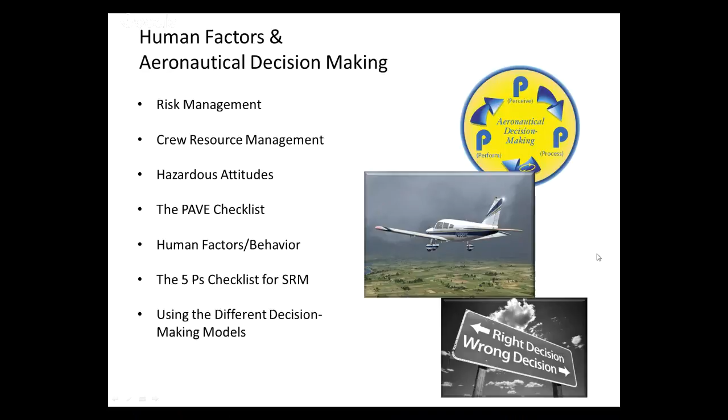When you actually look at the statistics the FAA and the NTSB publish from time to time on general aviation accident and incident statistics, and you look at the data over the past 20 to 30 years, there's a theme. Over 75% of all accidents have something in common. Actually, a couple things in common.

First, accidents that occur happen to be extremely preventable. A very large percentage of accidents happen to be preventable in nature. And there's a single common factor that you can always circle back to when it comes to general aviation accidents, and that is human-caused error.

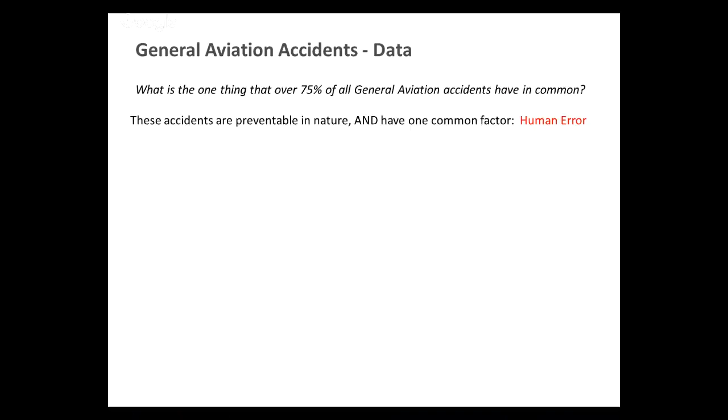In different contexts, of course. You might have heard it before in the news, whenever there's a notable aircraft accident, they always kind of talk about how there were these 3 or 4 factors, but at the end of the day, it was really the pilot's decision making or the pilot's actions that led to the root cause.

And if you look at some of the details, for instance in this report that was issued, I think this was issued in 2009 but incorporated data for a 20-year period, this is just a Pareto of Part 91.

Part 91 meaning general aviation, non-airline, non-commuter, business jet type activity, single engine, fatal accidents. You can just see the list. The Pareto list here is all things that we can more or less control, or is more or less within our control as pilot in command. Failure to maintain adequate flying speed, controlled flight into terrain, adverse weather, failure to avoid objects or obstructions, mid-air collisions, stuff like that.

The one thing you don't necessarily see on here, at least high up in the Pareto chart, is engine failure, or the plane just falling apart randomly. It's all controllable items, preventable items.

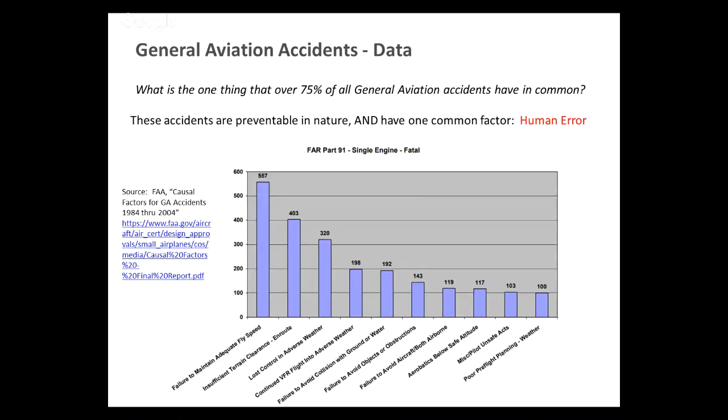Yeah, it's the last chapter of the book. It's chapter 17. It's all about the medical and human factors.

Just a side note, based upon Chris's comment from last time, will you make sure that your little icon at the bottom has the white border around it so that when I talk it doesn't flip the screen off? Yeah, I have it on now. Is it working for you? Oh yeah, I selected it on my end. I just needed you to select it on yours as well. Yeah, in case she watches this later, I was going to mention it. Oh yeah, good point. Cool, okay.

So let's dive into aeronautical decision making a little bit deeper.

ADM, aeronautical decision making, really encompasses the behavior a pilot has around two topics, two definable items: one being risk, and the other being hazard.

Risk, the way I like to think about it, is always present. There's always risks in everything we do in flying. Hazards tend to be items that pop up that were a risk and now happen to be a hazard. For instance, the weather. Weather is always a risk. Forecasts may not be correct, but are they so incorrect, or did you do your planning to such an extent that they transform from a risk into a hazard? Now there's something you actually have to deal with.

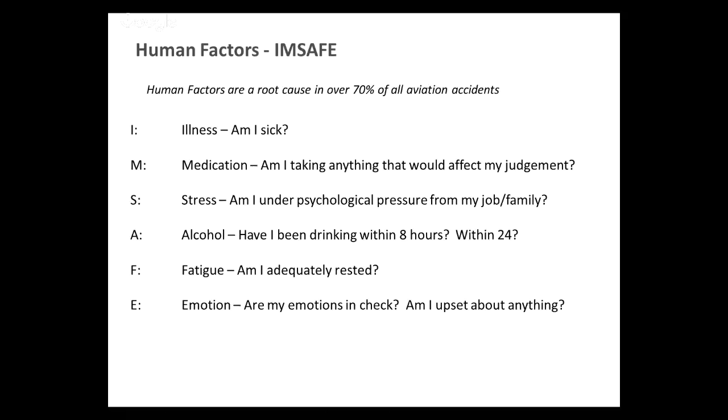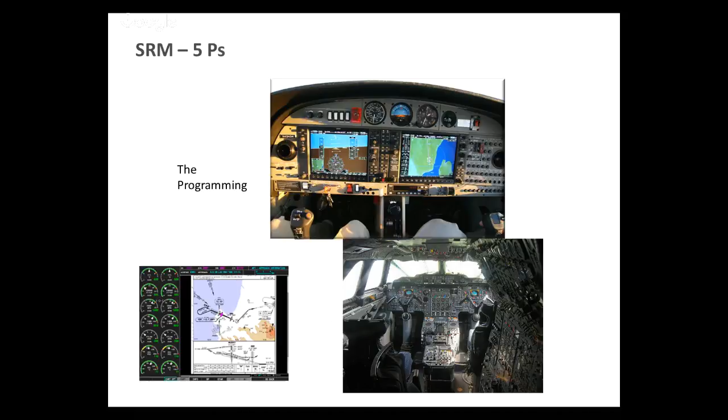So I've got a real life example I want to go through. Before we do that, does that the 5 Ps, does that kind of ring true? Do you understand how that might help you in your pre-flight planning to actually write some of that stuff out?

I do, and an interesting analog - even in my career world, you go to start a project, one of the things you do at the beginning and throughout is you're constantly looking for the potential risks to the project. So this fits with that professional experience of mine, I completely understand it. Yeah, that's a real good point, actually. That's like one of the big steps in project management, isn't it? Identifying where things are going to go wrong.

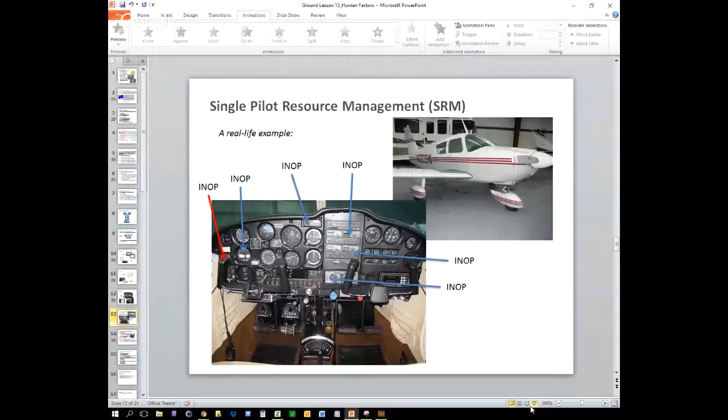Exactly. So I'm gonna walk through a real life example, and I think some of this stuff, unless you experience it in person or hear someone tell a story, kind of helps ground the topic a little bit. So let's walk through this example.

This was a year ago in November - year ago, maybe it was 2 years ago actually. I had my family in town, and my sister and her best friend flew in because Emily, my sister, and I were running in the Fort Worth Half Marathon. So everybody was in town. My parents drove their van down to watch, and it was great.

Well, Sunday, after the marathon, we were going to go flying. My father, who loves to fly, since I don't live at home anymore, doesn't get to fly that much. My sister hasn't been flying that much with me, but she enjoys it. And her friend had never been flying before, ever, in a small airplane. Wow, so this was going to be like a first experience for her. So she was extremely excited.

And so I was in a flying club - I might have told you this story before - that unfortunately had questionable equipment. I've got it up here on the screen. This particular aircraft is a Piper Cherokee. It was a PA-28 235, so it was like a Piper Cherokee with a souped up engine.

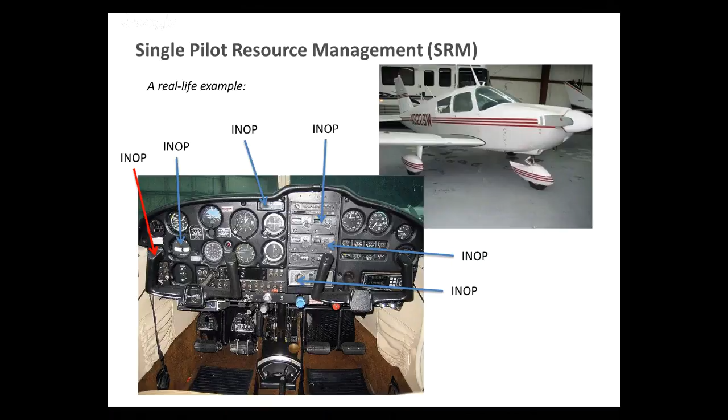So here we go, I'm going into my 5 Ps here, and I did not do a 5 P on paper, by the way, which got me into trouble - I did it in my head, which got me into trouble. So okay, here's the plan: what's the mission profile look like? Well, sister, dad, and friend going up for a joyride, we're just going Class G, not going into any controlled airports, just Class G flying. Dad loves to fly, friend has never been flying.

The plane is IFR certified, however, many of the avionics are inoperative, so take a mental note there. We've got a jerry-rigged comm transmit button set up - I put that in red because that would get me in trouble eventually here. So I made a mental note, it wasn't going to ground us, we were still going flying, but I took a mental note that I was going to have to make sure I used that properly.

The pilot, all good there. I passed the IMSAFE checklist. Passengers, of course, my dad's been flying, my sister's been flying. We're all good there, assumedly.

Our fourth passenger might have been nervous. She didn't look nervous. Of course, I'm a very careful pilot, so I want to make sure she's comfortable, check in with her, make sure she's got all her questions answered, and give her a good flight briefing. But that could be a risk, so I take a mental note.

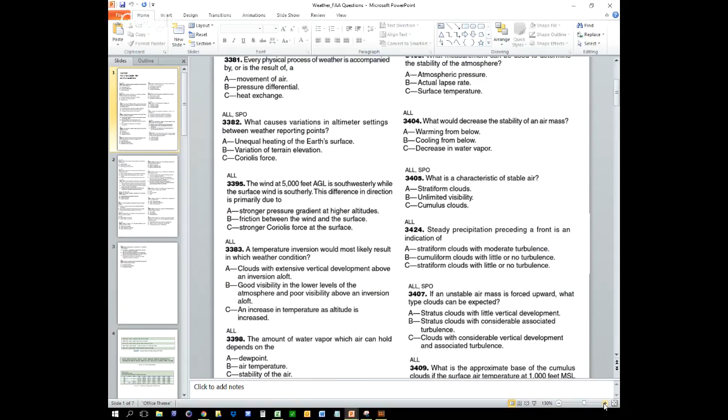Yeah, so that's how I try to approach the question. It's a good way to approach it, because to be honest with you, even though you can memorize these questions and answers as one way to do it, in application, understanding the theory is really going to help, right?

I don't want to memorize the question, I want to know the theory. Oh yeah, no, for sure. So before I was just trying to get it, and you're like, well no, just understand the theory, because when it happens in real life, it won't be in question form.

No, for sure, when you're doing your flight planning stuff, it's not going to be like that. It's going to be all you, like what you know, right? Even if you're in the plane and something like that happens, it's not this example, but anything, it's like okay, suddenly I'm faced with a problem I have to solve, and it's not an ABC multiple choice situation. I need to understand the theory of what's going on around me so that I can correctly get to a solution.

So, temperature inversions. What the FAA wants you to understand with the temperature inversion is obviously what it is: your lapse rate is not typical. You've got more of an increase in temperature with altitude. But the way they present this question is kind of a trick question, at least I think it catches a lot of people.

So they say a temperature inversion would most likely result in which weather condition? And immediately your eyes go down to this: an increase in temperature as altitude is increased. Because that's what a temperature inversion is. But that's not a weather condition, that's not a result. That's just what it is.

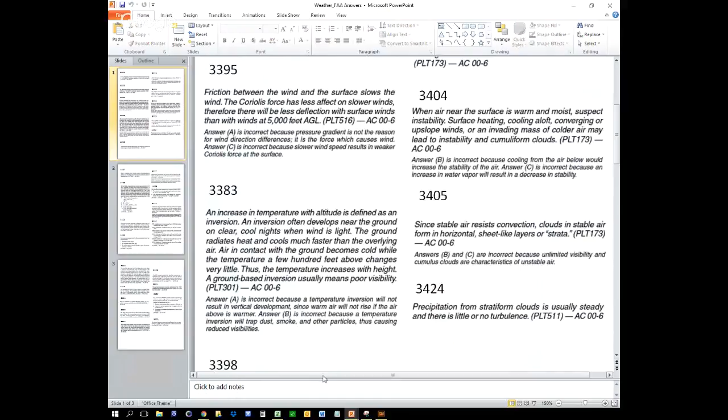What? Are you serious? Wow. Oh, this is where the what-if stuff is so tricky. Yeah, well hey, you know what though, the theory—we didn't screw the theory up.

What they want you to get away from this is that a temperature inversion results in poor visibility. I didn't even really—I was looking at it more from the vertical development perspective. So answer A is incorrect because temperature inversion will not result in vertical development since warm air will not rise if the air above is warmer. So that's kind of how I approached that.

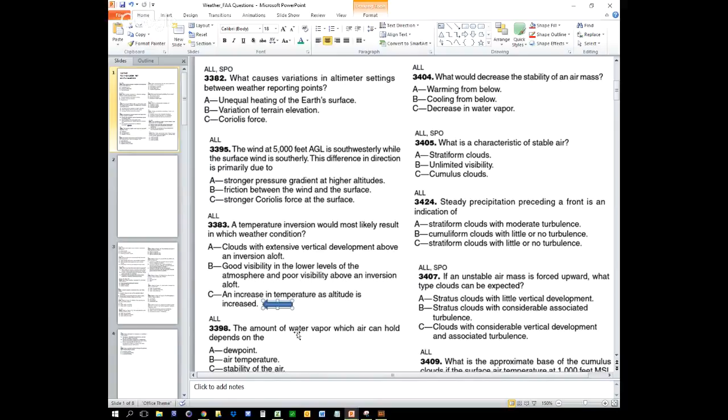Okay, yeah, but I guess they bring up a good point—poor visibility, yeah. So here I am thinking it's a trick question because that's not really a result of, you know what I mean. Yeah, that's where I got thrown off too. It's like, well, that's what it is. I wouldn't know if it possibly has a weather condition, but okay.

Let's do another one if we got a minute or two. Yeah, man. So...

3407. I think where I struggled on this one was just trying to remember which clouds are—yeah, I can remember the thunderstorm cloud, like the towering cumulonimbus, but I can't remember when stratus is good or bad.

Yeah, so you want to remember stratus clouds are most often associated with stable air, stable pockets of air, a stable air mass. And whenever they pose a question to you and tell you that an air mass is being forced upward and it's unstable, then you want to think thunderstorms. Right, and that in this case would be C, clouds with considerable vertical development and associated turbulence.

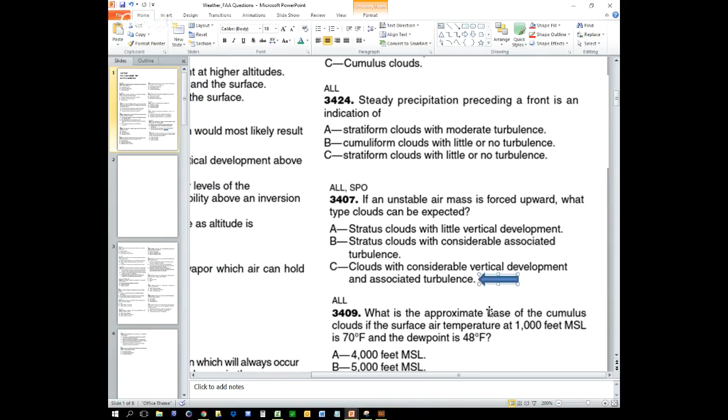That's the one I guessed. Yeah. There's one more that had to do with rain. Where was it? Just a second.

Oh yeah, 3424 is first page, second column, fourth question down. Yep. Steady precipitation preceding a front is an indication of. Only, I could remember when I was looking at this question is stuff that preceded the front or the squalls.

Right, so I got hung up with this because I remember that a front, depending on the type of front, is pushing at different rates. That's kind of, to me, a trick question because in my mind warm front precipitation typically doesn't precede the front. But the key term they want you to look at here is steady precipitation.

Which suggests that it's stable? Yes, which is the opposite of showery precipitation. This steady precipitation is like your rainy day—you wake up, it's raining, it rains all day, it's gray outside, it just rains, right?

Right, we don't—what's tricky, what kind of is interesting—we don't get a lot of that in Texas. We get a lot of the opposite, like thunderstorms and squall lines.

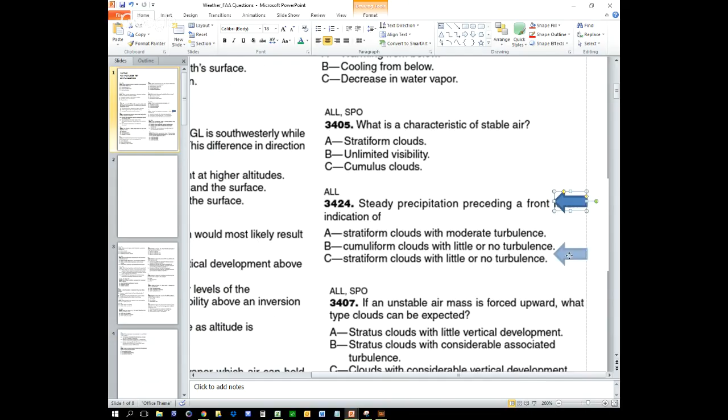Okay, so then it's got to be one of the stratiform answers. And I really don't think the front information gives you anything—I think they just put that in there to confuse you. But stratiform clouds are typically not associated with turbulence, ever. So I'm going to have to say it's C, stratiform clouds with little or no turbulence.

Okay, what did I guess? 3424, I guessed C. Yeah, you'd be right.

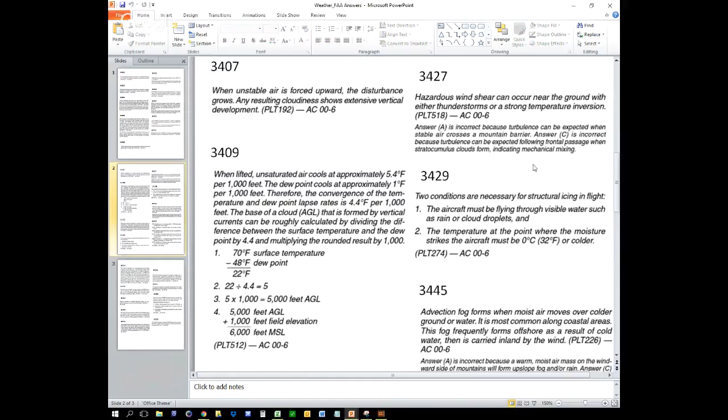Precipitation from stratiform clouds is usually steady with little or no turbulence. The thing I want to get away from is guessing and get to knowing. This was helpful, definitely. Whenever there's a couple key indicators, it's not just to pass the test, it's definitely in application too. But anytime...

Anytime you've got an unstable air mass, you're going to have cumuliform clouds. Anytime you have a stable air mass, you're going to have stratiform or cirrus type clouds. Cumuliform clouds are always associated with turbulence, stratiform clouds typically are not. From a precipitation standpoint, rain showers are associated with cumuliform and turbulence, and steady precipitation is associated with stratiform and not turbulent. And then loosely, you could say cold fronts are associated with turbulent cumuliform thunderstorms, and warm fronts are associated with stratiform, steady precipitation, no turbulence.

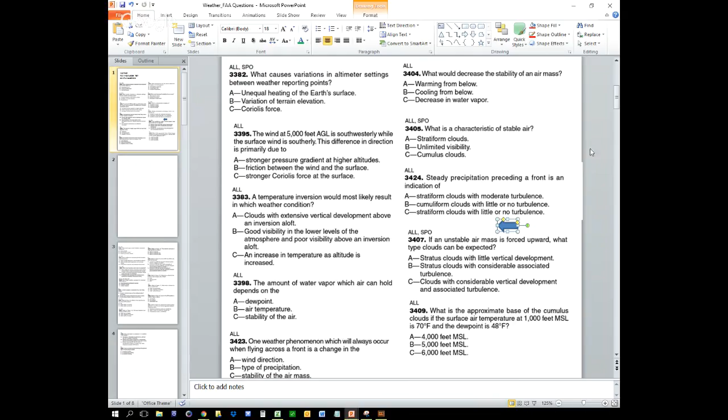Okay, so say it again. Cold front, yeah. You can loosely say this, it's definitely not a rule, more of a typical. So when I'm grouping these up, I'm doing cold front generally is cumuliform, rain showers, and good visibility, and turbulence, and thunderstorms, typically. Now it's not the rule, but typically, especially here in Texas, it's very typical.

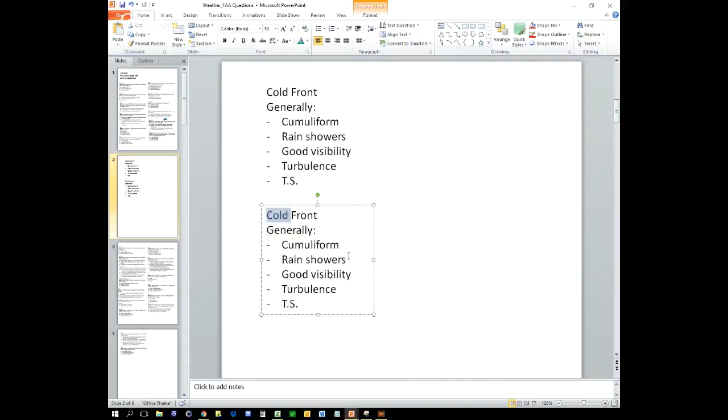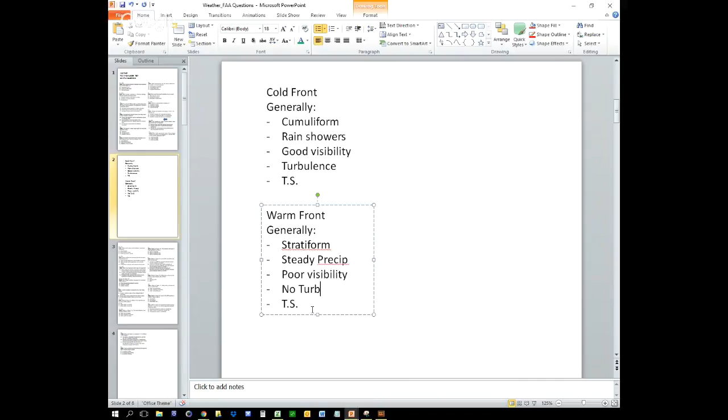Warm front: stratiform clouds, steady precipitation, poor visibility, no turbulence, no thunderstorms.

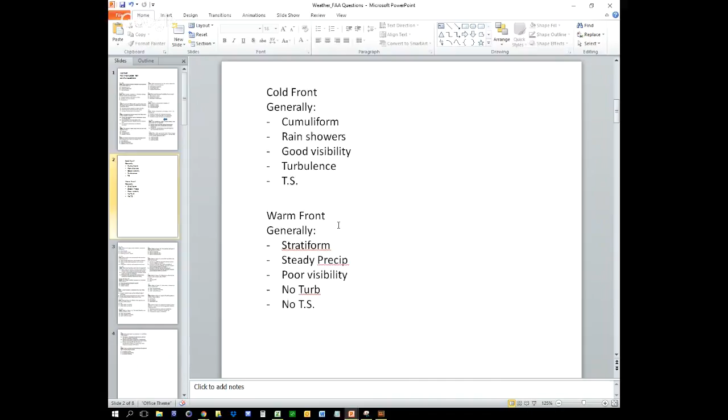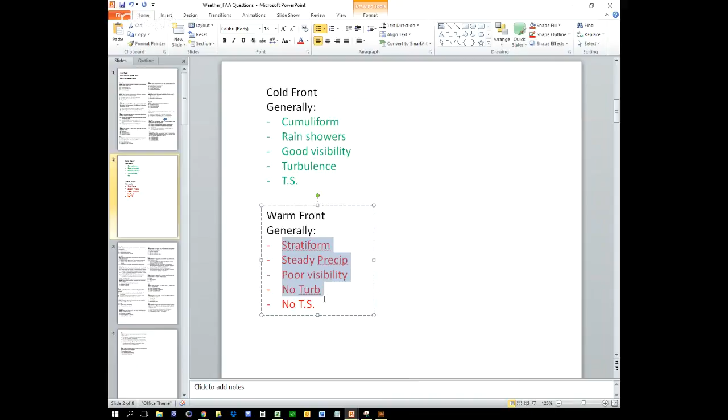Now, back to my comment about it being typical, not the rule. Even if you've got thunderstorms with cumuliform clouds on a warm front, these kinds of weather conditions always stick together. So regardless of frontal activity, these always stick together. If you've got cumuliform clouds, these are the weather conditions you're going to have. There's no mixing. You're never going to find stratiform clouds with turbulence and rain showers. It's one or the other.

I like to call this my rainy day, and this up here is a good classification of your violent thunderstorm day.

That's really helpful. That's kind of what I'm looking for with some of these questions: are there general frameworks I can operate within that aren't the whole truth all the time, but can give you a starting point of how to analyze?

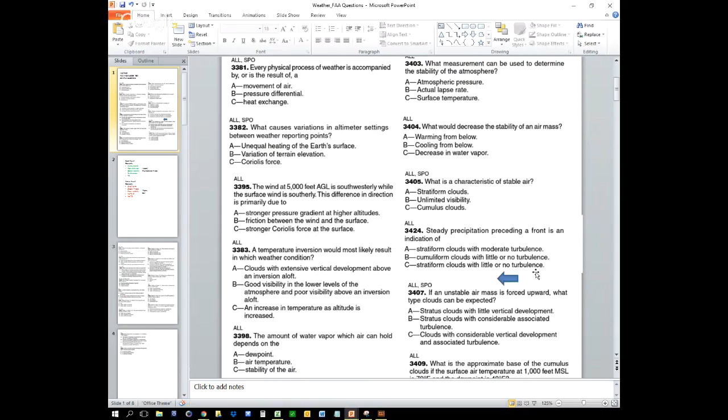Oh, absolutely. And I didn't throw a lot of those questions in here, I think I threw one in. Let's see, did I fly any others? Where do you get these questions, by the way?

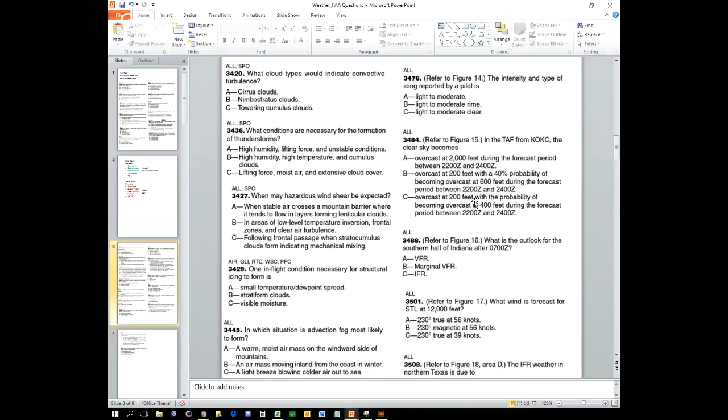I purchased the ASA private pilot test prep book that has all these questions in it. Nice, similar to probably what you've got with Sporty's. I went looking for these at one point, just curious what was available, and I did find the ASA one, but I didn't buy it. Is Sporty's giving you the same thing with the numbers? I haven't gone through Sporty's in a while, but yes, the questions are generally the same and they come with explanations. There's 800 something questions, I think, total.

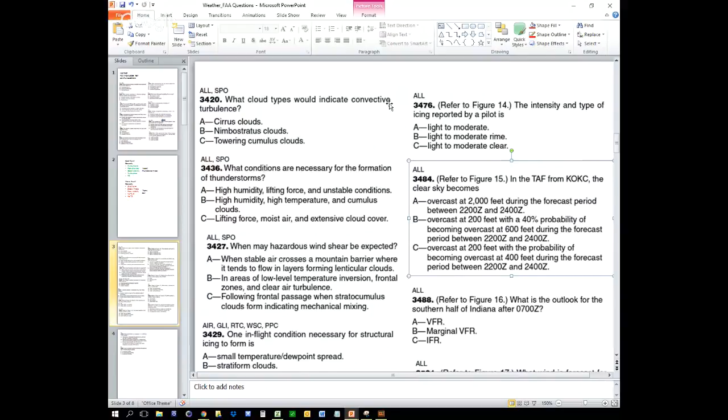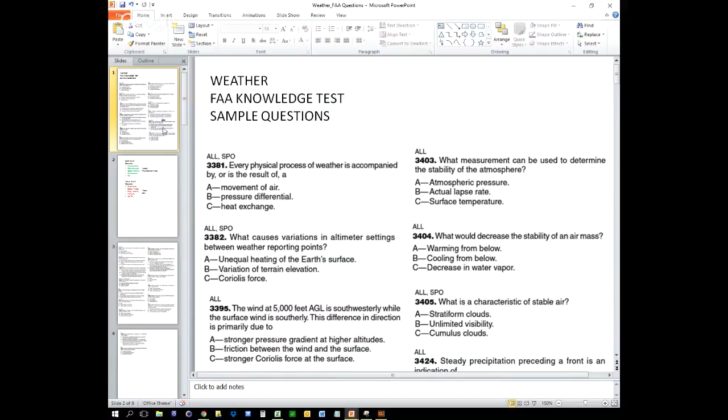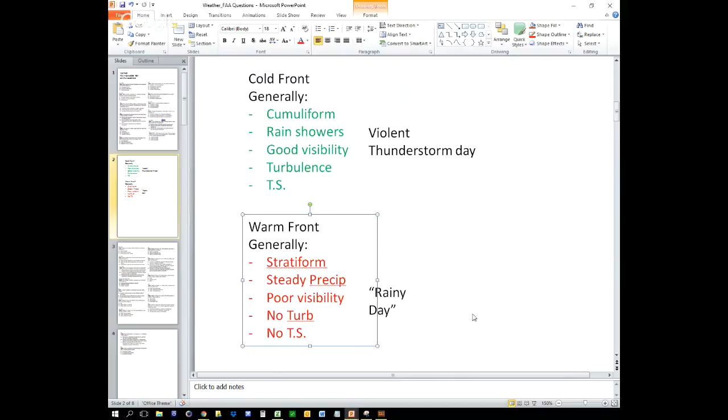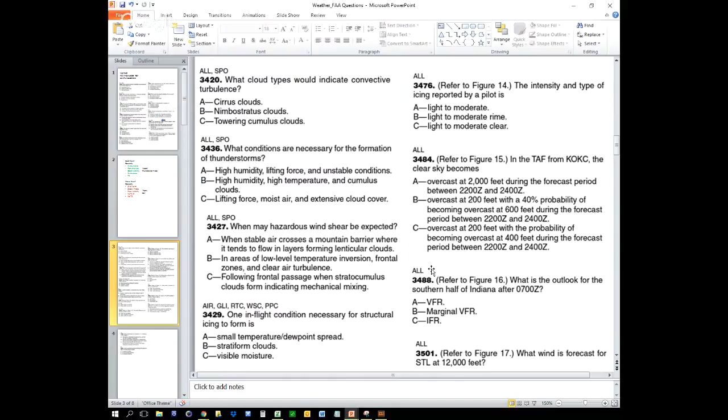That's grouped by category. Here's another question that kind of goes back to what you were saying about frameworks: what cloud types would indicate convective turbulence? Going back to here, that would be our violent thunderstorm day, so it's going to be cumuliform. The only answer here that makes sense is towering cumulus clouds. Nimbostratus and cirrus are down here in the rainy day, no turbulent type activity. Yeah, I actually got that one right. So yeah, there are general frameworks when it comes to different air mass qualities.

Cool, man, that was helpful. Good, all right man. Any other questions? I'm gonna go back through the answers and study them a little bit, and if I don't get anything, I'll circle back and ping you if any were confusing. Sounds like a plan. Cool, all right man, sounds good.